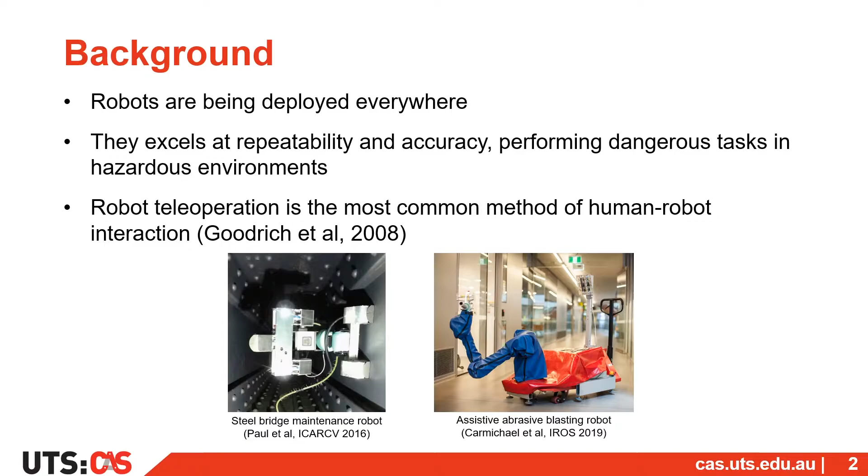Therefore, a robot system can achieve more productivity by adopting a form of human-robot interaction, most commonly in the form of robot teleoperation. But there is a problem. With traditional remote robot teleoperation methods that rely on 2D interfaces, such as control panels or graphical user interfaces, it can be confusing for operators of complex systems. During robot teleoperation, a constrained view of the robot status and limitations on translating user input into robot controls has been shown to reduce task performance.

Such systems often require extensive training and knowledge due to the limited visual feedback provided and unorthodox methods of interactions employed. Furthermore, the elimination of human operators from their respective dangerous working environments also removes the instinctive localized perspective. For example, for high-powered robots, the human operator cannot be in the same space as the robot working area.

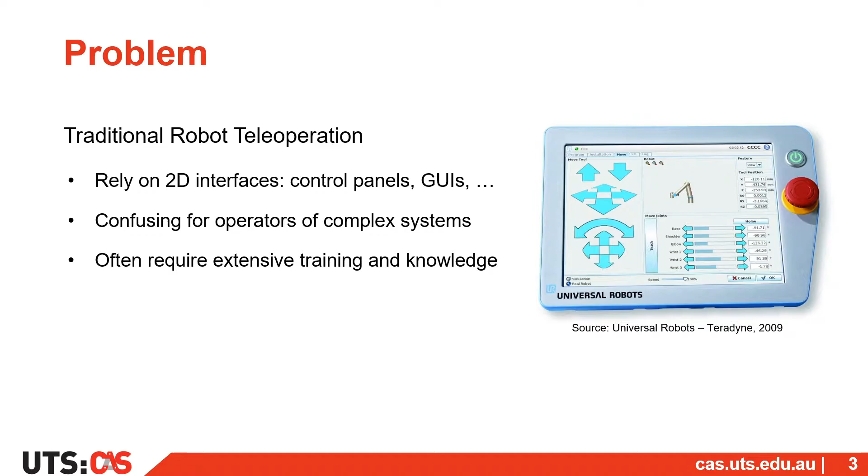On the other hand, VR's ability to track movements in 3D space and translate performed motions provides an intuitive platform to explore and interact with a virtual environment. And therefore, VR provides an interface that leverages innate human actions to manipulate various aspects of the environment. These advantages make VR a suitable platform for robot teleoperation, improving visualization and reducing both the background knowledge required and the control limitations caused by physical distance.

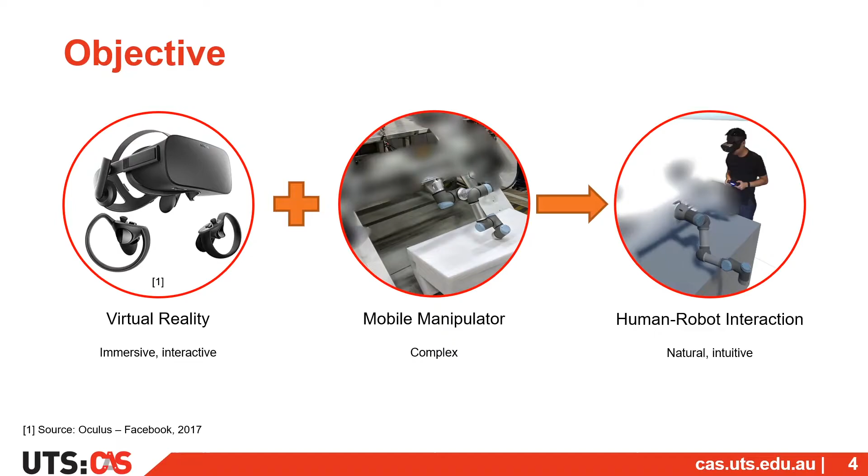So our objective is to employ these benefits of VR as an immersive and interactive platform to use as a control interface for a mobile manipulator, which is complex by design, to create a more natural and intuitive human-robot interaction experience. Researchers have investigated human-robot interaction methods that enable natural actions in the real world to be expressed in VR. This includes visualizing in 3D the robot's intention and future positions.

In these applications, the operators usually inspect the robot and its environment either with a robot-centric view, where the user can walk around the robot, or an egocentric view, where the user assumes a first-person view, as if they were the robot. The use of VR has also been shown to help users predict potential collisions, as they have better spatial awareness in 3D, and VR peripherals such as the controllers that come with the most common VR headsets have their position tracked in 3D space, which can be used for applications such as robot path reprogramming, for programming by demonstration tasks, or making appropriate adjustments after the robot has finished its path planning algorithm.

Studies comparing 2D interfaces to 3D interfaces, such as VR or AR, have shown a significant increase in user task performance and a reduction in workload for robot teleoperation tasks. And this is the overview of our own system. We have the real mobile manipulator that we developed and built for an industry partner. It has a UR3 industrial robot arm at the front, which is a 6 degree of freedom robot, and its own control framework to control the motors on board.

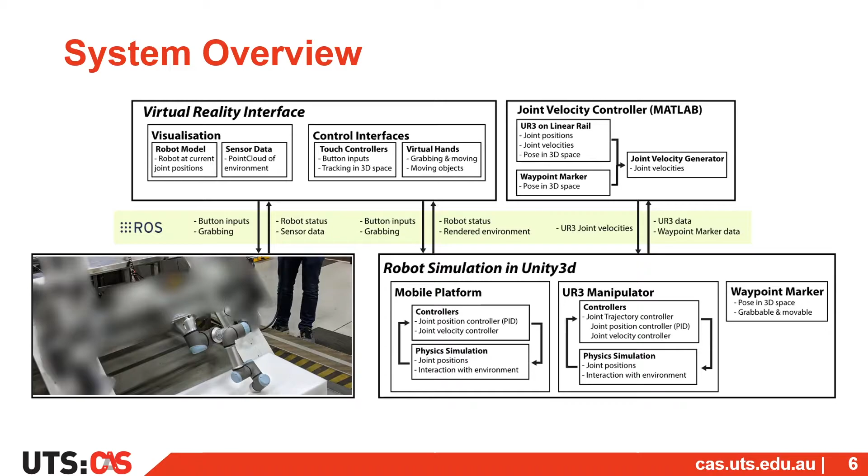We also built a simulated version of the robot in Unity 3D, and we were able to get a realistic physics-based simulation of the robot. Similarly, the control schemes of both the mobile platform and the arm were carried over, which allowed operators to seamlessly transition between controlling the real one and the simulated one.

The VR interface or headset that we are using is an Oculus Rift S, paired with the Oculus Touch controllers. The headset provided pose tracking in 3D space, updating the view of the user accordingly. When in VR, users can view the 3D models of the controllers, or alternatively have virtual hands that they can use to grab and point at objects in the virtual environment.

And finally, the control method that we use to control the arm is resolved motion rate control, which was programmed in MATLAB, and we control the arm using joint velocities. And finally, the glue that holds it all together and handles all the communication between components is the Robot Operating System, ROS.

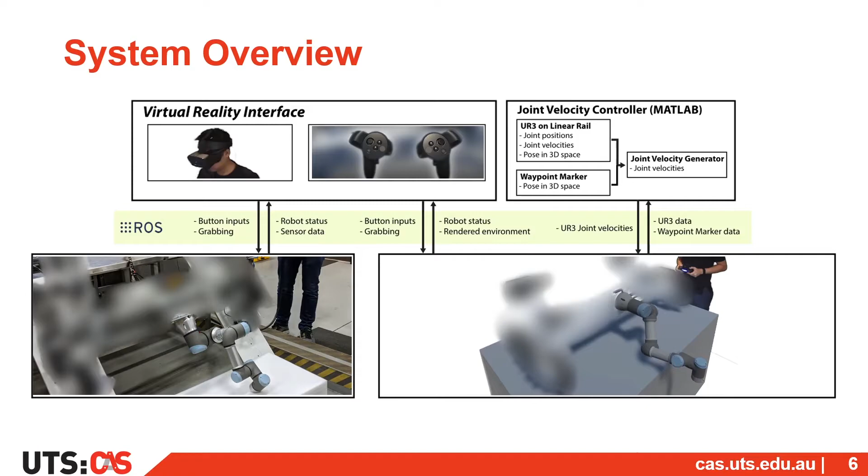And we also use a package called ROS Sharp to handle communication between ROS and Unity. The first experiment was designed to investigate the intuitiveness of a 3D VR interface in comparison to a 2D interface manipulated by a mouse and keyboard.

Participants were asked to perform a robot control task that resembled a practical and relevant use of the mobile manipulator. Users were asked to manipulate a detached 3D model of the end effector tool, called the waypoint marker, to guide the robot towards a desired end effector tool pose. Users were also asked to indicate when they had completed the task, with the goal specified as close as possible and as quickly as possible.

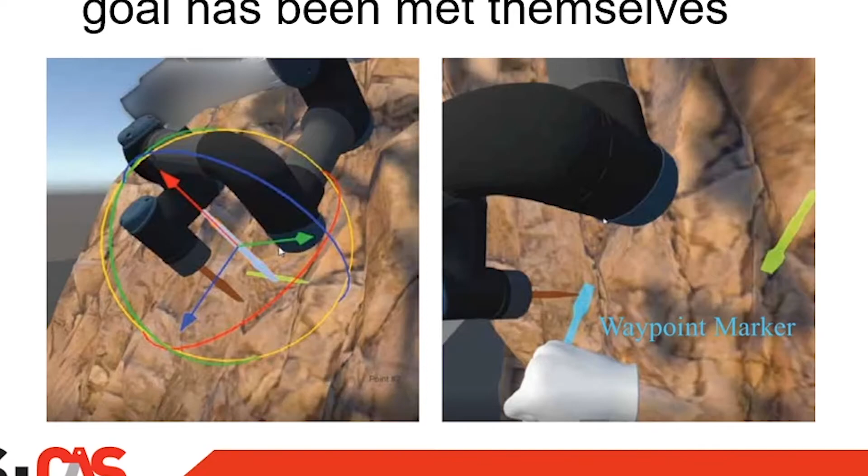We had a total of 10 volunteers for the experiment, and on average, participants reported little experience with VR and an intermediate level of experience with working with robots. So here are the two interfaces. With the 2D interface, the participants use a flat screen monitor to view the scene, and the keyboard and mouse to interact with the view of the scene and manipulate the waypoint marker.

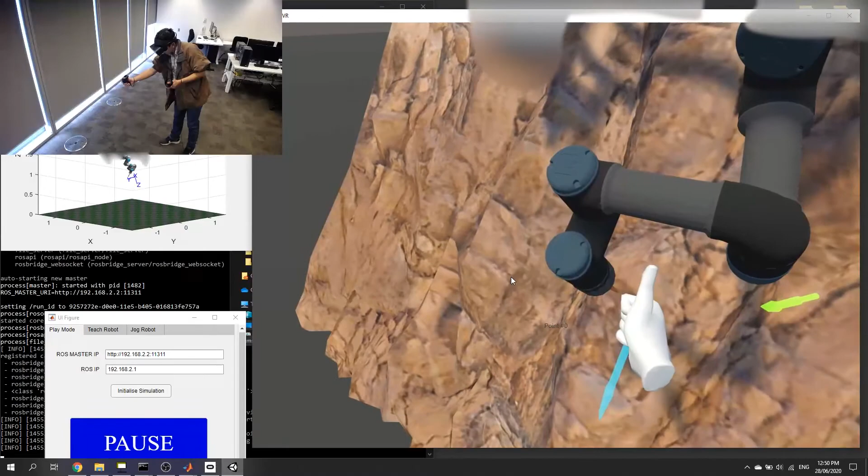With the 3D VR interface, participants use an Oculus headset to view the scene and could change their perspective by just naturally moving their heads around in 3D space. To move the waypoint marker, users could reach out and grab it with either hand, and they could see their virtual hands in VR performing the grabbing action.

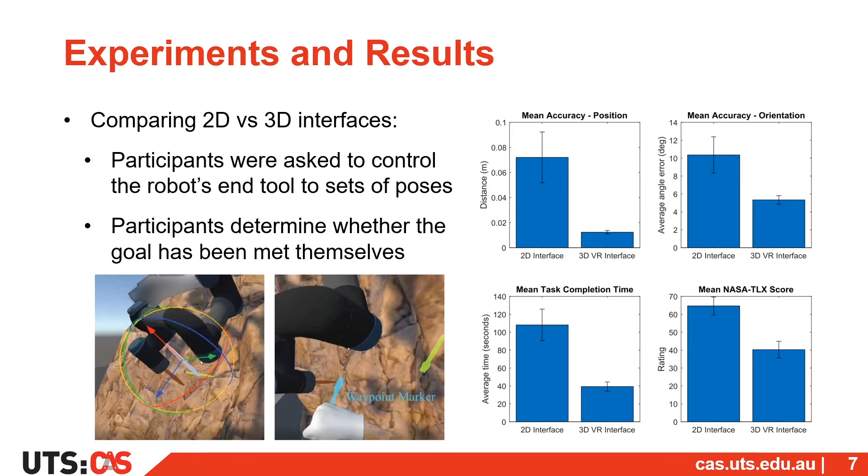The second experiment was on the effect of control latency on task performance. Participants were asked to do the same task but in 3 different control latency scenarios. Minimum latency, which is almost real time, medium latency, which is 500 milliseconds, and high latency, which is about 1000 milliseconds or 1 second ping.

There are other interesting further discussions from the experiment. We analyzed and compared the performance of different user groups based on their experience with working with robots. Intermediate users performed better than the novice users as expected. However, when using the 3D VR interface, novice users were able to perform at a significantly closer level to the more experienced users compared to when they were using the 2D interface. This further reinforces the use of VR as an intuitive universal interface between humans and robots.